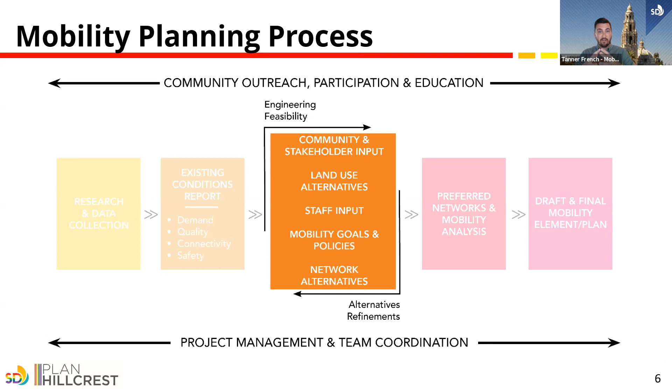So next slide. The longest and most involved is this current middle section that we're in now. As shown, this includes developing concepts and network scenarios, as we discussed in January, and we'll continue that discussion today, obtaining input from the community and various other stakeholders. And in the coming months, this will also include measuring our recommendations with land use scenarios for compatibility and developing plan policies. So next slide, just to kind of remind us of the conversation in January.

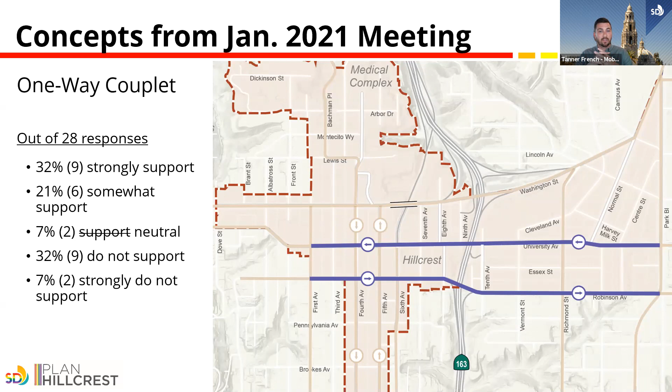The presentation in January centered around 2 main concepts for University Avenue. The first was a couplet concept, where University Avenue would become one-way westbound and Robinson Avenue would become one-way eastbound. As seen on the slide, the concept received a mixed bag of support and non-support. Through discussion and review of the meeting chat, we heard valuable input about some drawbacks of a full couplet concept.

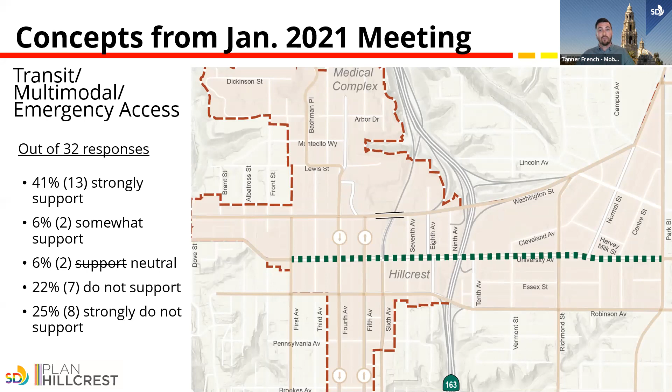The second University Avenue concept was converting the corridor to transit, active transportation, and emergency vehicles only, as depicted on the slide. Again, the concept received a mixed bag of support and non-support. However, through discussion and the chat, there was more dialogue about how to improve the concept and things to consider if it moved forward. So elements of both concepts have been carried forward and modified, while some have been completely eliminated.

I also wanted to quickly discuss other miscellaneous but very important items that we discussed in January. We discussed operational issues like intersection treatments and different types of mid-block crossings. We also heard a lot of feedback about park-once opportunities, as well as mobility hub treatments and alley activation. While we won't necessarily cover these topics again tonight, they are things we'll continue to work on and look to implement in the plan.

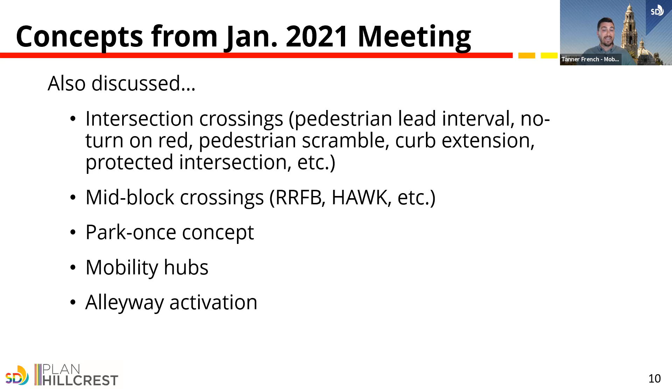Okay, so on to what we're really here to talk about tonight. After receiving input about those higher level concepts we discussed in January, our task has been to develop the full roadway network recommendations. But also stepping back a bit, we wanted to make sure that we're staying connected with the other disciplines and the plan update process as a whole.

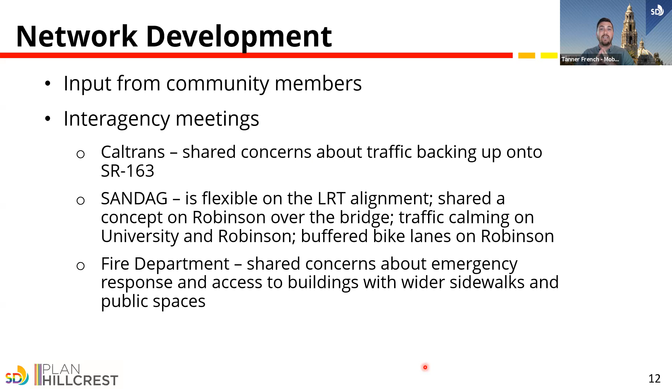Aside from this group's input, we've also solicited input from other stakeholders, including Caltrans, SANDAG, and the city's fire department, to discuss and vet the information. Each of these groups provides unique perspectives, and cumulatively we've used all of the input to develop 3 network scenarios that we'll present tonight.

So when Chen Ryan staff walk through the respective options, they'll start with the central theme of the option, which is University Avenue, but also note key recommendations throughout the community. They'll do this from a perspective of all modes, and show how they're all interacting within that specific scenario. The first scenario carries forward that transit, multimodal, and emergency-only setup for University Avenue, but it introduces changes we've made based on feedback.

The second allocates right-of-way for transit-only lanes, but continues to allow vehicular traffic on University, an option we wanted to look at. And third is a hybrid option that we've developed to try to incorporate some of the benefits of both of the first two options.

Each of these options will provide distinct benefits for certain modes while being unable to do so for other modes, because of competing priorities and constrained rights of way. That's really the point we want to get across tonight, showing those interactions, and that's really what we'd like to get feedback on tonight. As Chen Ryan staff walk through each scenario, they've included an overview of the network from the map perspective, top down, followed by cross-section views of the main roadways so you can get a good sense of what each would look like.

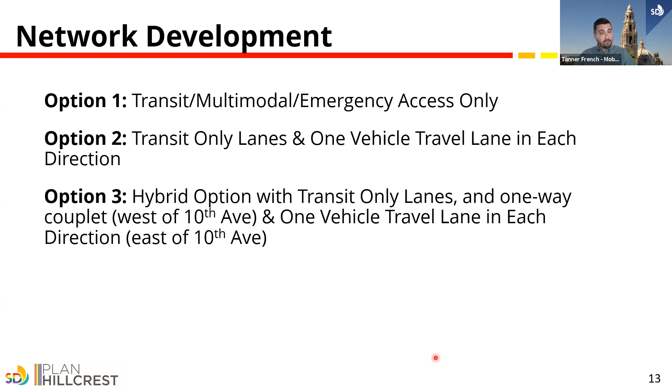What we'd like as the outcome of tonight's meeting is not to fully decide on a network scenario, but rather to provide information on the options and obtain feedback on each of them. Our plan is to tailor the options based on that feedback and include them in the online community engagement tool that Shannon and the rest of the team will be unveiling later in the fall. That will be the mechanism to finally provide a vote on each of the options.

Okay, so with that, I'll pass the presentation over to Monique from Chen Ryan to discuss the pedestrian and transit network quickly, and then jump right into our first network scenario. Take it away, Monique. Thank you so much, Tanner.

Good evening, everyone. As Tanner mentioned, this evening we have a lot of materials, and I want to start talking about the various mobility networks for each travel mode. For pedestrian and transit travel modes, we're only going to have one network to share as there's not going to be a whole lot of variation. So I'm going to start with the pedestrian network here.

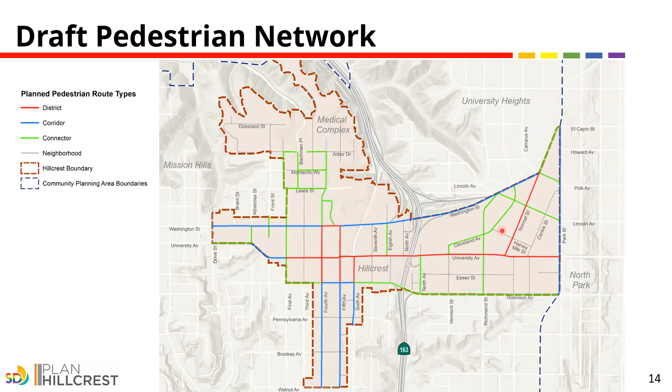Based on our team's review of the light rail alignment earlier, it was showing from 5th Avenue going up onto University, then up onto Park Boulevard. But because we know the cycle tracks are coming on 5th Avenue, and 5th Avenue actually provides some very important direct vehicular access to existing buildings and townhomes, we as a team thought that 6th Avenue is a better alignment for the future light rail.

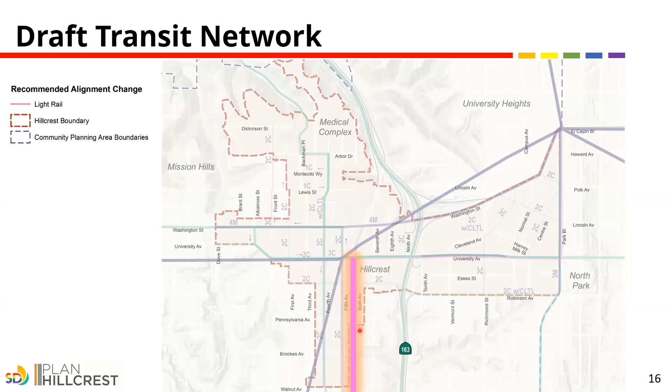Now we're going to option 1 of the vehicular network. This option reflects what Tanner mentioned earlier, the transit multimodal emergency access only option for University Avenue, which we discussed back in January at a pretty high level, and it received about 50% support from participants during that meeting. So we as a team decided to take a closer look at this option. In the next slide, we'll show the roadway changes suggested for the option 1 network.

The red line on this map is the transit, emergency, and multimodal only corridor, spanning from 4th Avenue to Park Boulevard. While this option provides a superior corridor for walking, biking, and transit operations, it does also create some challenges in terms of vehicular circulation that could potentially impact access to local businesses located adjacent to University Avenue.

Tanner mentioned that we've talked to the fire department, so we heard some concerns from our fire department in terms of access and also potential response time for them to get to emergencies if this section is closed to vehicular travel. There's a fire station located on 9th and University.

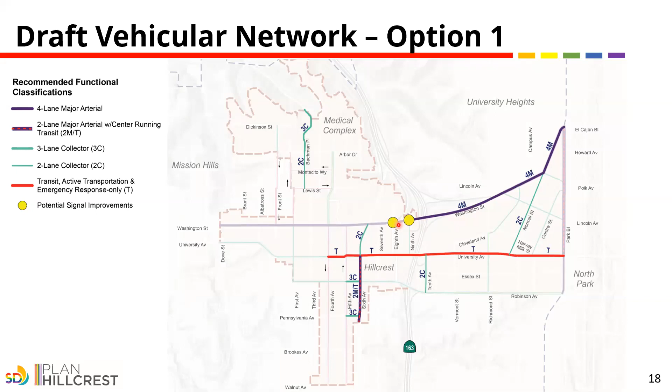Two other things I want to point out here. One is SANDAG is working on, as you all know, the Bachman Place Bikeway project. As part of that project, SANDAG is proposing contraflow bike lanes on 3rd Avenue between Lewis Street and Washington Street, as well as Lewis Street between Bachman and 3rd Avenue. I'll talk a little bit about some of the benefits of this contraflow bike lane.

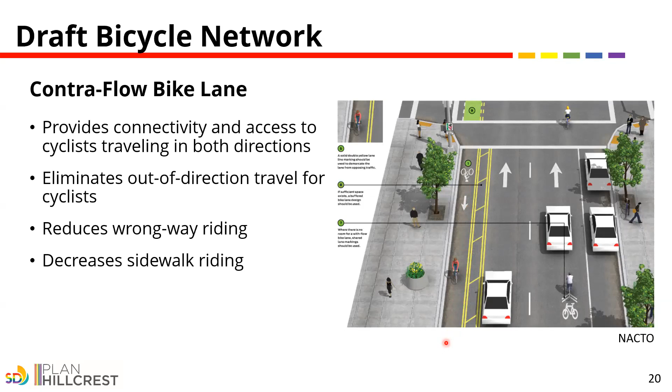So, contraflow bike lane—here's a figure from NACTO, an approved design style. What does it do, and why do people want to provide contraflow bike lanes? It provides connectivity and access to cyclists traveling in both directions on a narrower street, and eliminates out-of-direction travel for cyclists. The more direct the route, the more chances people want to bike. This provides a direct connection so cyclists can stay within the route they planned for. Because you have the bike facility covered on a one-way street, it also reduces wrong-way riding as well as sidewalk riding.

An advisory bike lane is also called an edge lane road. This kind of facility works well in a narrow setting where we have right-of-way or roadway pavement constraints. However, it really works best in low speed, low volume scenarios.

Here are a few pictures we gathered from various cities. Europe uses a lot of these, as well as the Midwest, like Minneapolis on 14th Street, plus the East Coast and Canada. So this kind of application is relatively new.

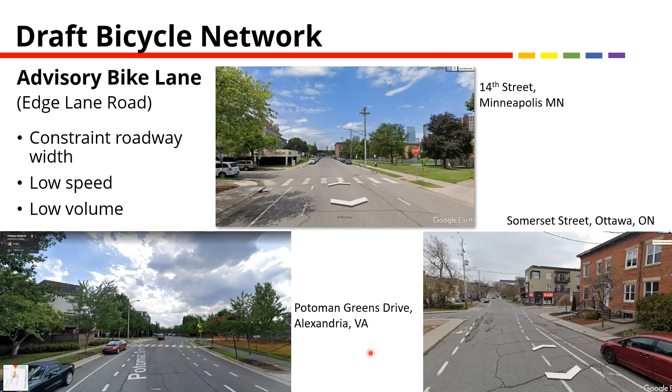However, our city is already starting to look at where else we can implement these kinds of facilities. I know transportation and stormwater are looking at potentially putting an advisory bike lane on Hancock Street, just north of us here.

Now, there's a lot of information. Now we'll dive even deeper and start looking at what some of the roadways could look like with the various street options. So I'm going to focus on option one.

Since University varies in size and cross section as of today, we decided to break this corridor into three sections. The western section focuses between 1st and 6th Avenues, the middle section is between 6th and 9th-10th Avenues, and the eastern section is 10th Avenue going east all the way to Park.

I'm going to present University and Robinson as a pair, so we can see how these two corridors can work together.

First, the western section of University is relatively similar to what it is out there today, with a 30-foot curb to curb. However, what we're proposing is to eliminate on-street parking on one side in lieu of installing class 2 bicycle lanes in both directions.

In the pair south of University, we're looking at Robinson Avenue in the western section, 36 feet curb to curb existing, and we're not making any proposals to change the cross section under option 1.

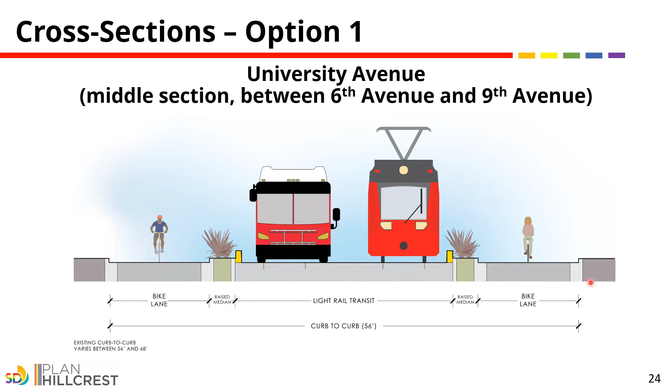Going down from the same section onto Robinson, this is probably one of the most constrained sections on Robinson. This is right on the overpass at 163, only about 26 feet curb to curb, so we're not proposing any changes under this scenario—just one lane per direction with no on-street parking and a class 3 bicycle route.

Going east onto University, we're maintaining the center running transit. Now we're having a little bit bigger buffer because we have more room to play with, and again, the dedicated separated bicycle lanes or cycle tracks.

So what I want to point out is that the existing curb to curb for a large section of the eastern section actually ranges from 103 to 110 feet. There's a lot of room that can be converted into pedestrian realm, wider sidewalk, place-making opportunities, as well as linear parks. Going east between Normal and Park, the road narrows a little bit.

So that facility, the extra wide sidewalk, may have to go away on the eastern side.

South of University Avenue, on the eastern section of Robinson, this is again very similar to what it is out there today. We're not planning or proposing any changes for this section under option 1.

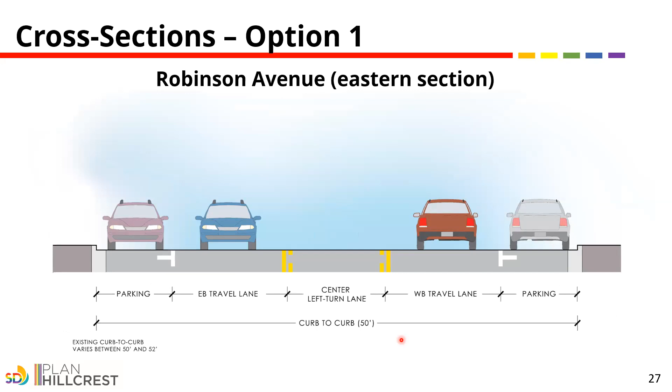So to think back, we didn't propose any changes on Robinson Avenue under option 1. Most of the variations you see—the roadway modifications proposed—are along University Avenue.

Quickly talking about 5th Avenue, you've probably all seen construction happening there to implement the cycle track. This reflects what's going to be out there very soon, and also kind of a mirror image of what 4th Avenue could look like, with the exception that everything's traveling southbound.

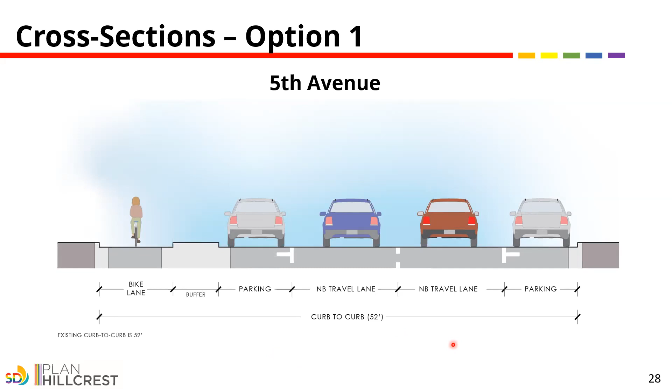We talked about 6th Avenue being one of the potentially better alignments for the light rail. Here is a cross section representing what future 6th Avenue could look like—converting one travel lane from each direction into a light rail guideway, with on-street parking also lost in certain areas.

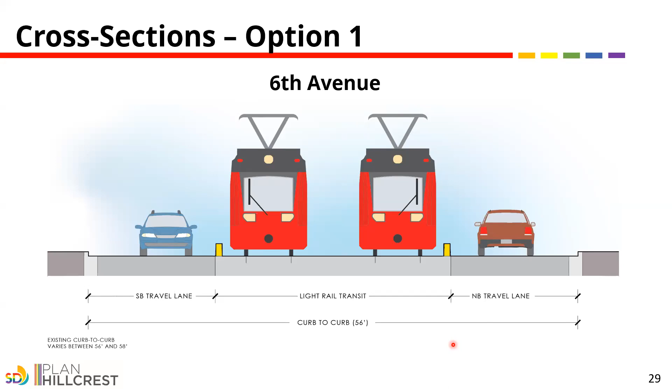Herbert Street reflects the advisory bike lane, 40 feet curb to curb with on-street parking maintained. We go ahead and start designating the bike lane. These are going to be marked and striped on the pavement. But what is different than any other road is that the vehicular travel lane is much narrower than two lanes. It's really just one travel lane.

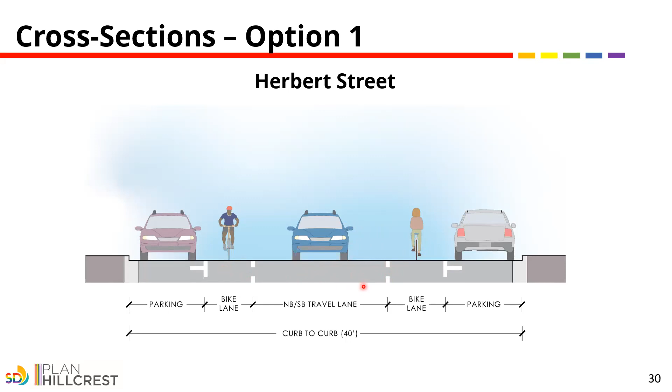So when you see two vehicles coming from both directions, one vehicle would either veer off and get into the bike lane so the other one can pass. As it continues to move, they can merge back into the travel lane. So this really provides a higher quality, more comfortable experience for cyclists with this scenario.

With that, I'm going to pause and ask if there are any clarification questions for option 1. As both Tanner and Shannon mentioned, we're going to have a bigger discussion toward the end as you listen to all of the options. So for this next 5 minutes, if there are any clarification questions for option 1, I'm here to answer.

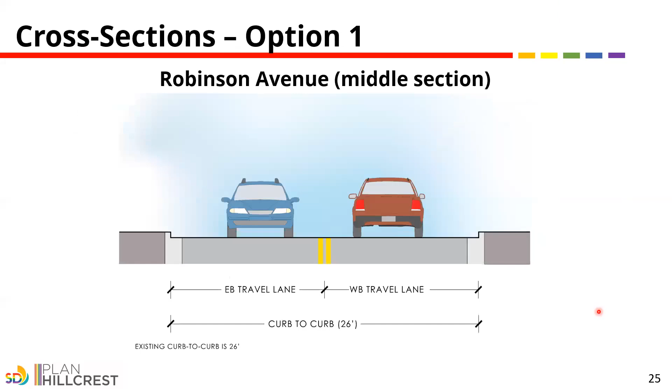That comes around with the 5 big moves. Our region is pushing for this. The University and 5th corridors were added as part of the 2021 RTP. As you can see, there's even commuter rail proposed within University. Dark blue is actually commuter rail, so it's probably coming in the form of grade separated, either elevated or subway style. This is part of the 2021 RTP that's out there for public review. SANDAG is anticipating to adopt this plan later this year in October.

I see. But the 5 big moves overall has like a $177 billion price tag. So is there any schedule assigned to this portion of the plan?

That's a great question. Tanner, sounds like you want to say something. I would just say that they have reasonably expected and revenue constrained options. I don't think we're necessarily here to talk about SANDAG's process, but what we work with them as our long range transit planners, and what they're showing in their plans, we will do the best that we can to accommodate.

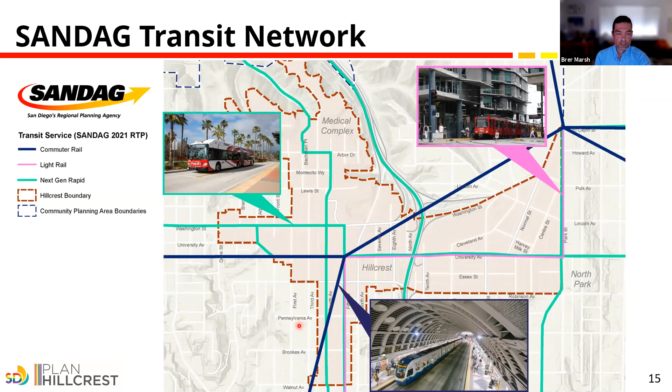I just have one additional comment, and that is I noticed there was a diagram of Robinson. It seems that it's going to remain car only because of its width. I'd just like to point out that it is used by cyclists and pedestrians as a connection down the hill to Little Italy, so please keep that in mind, because it is one of the shortcuts to get from downtown Hillcrest to Little Italy on a bicycle quite quickly.

That's why you've got to listen to the next few options. Yeah, there's some more exciting stuff coming. I appreciate it, thank you.

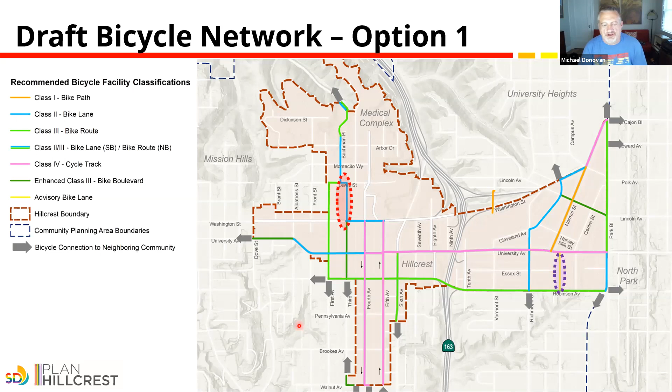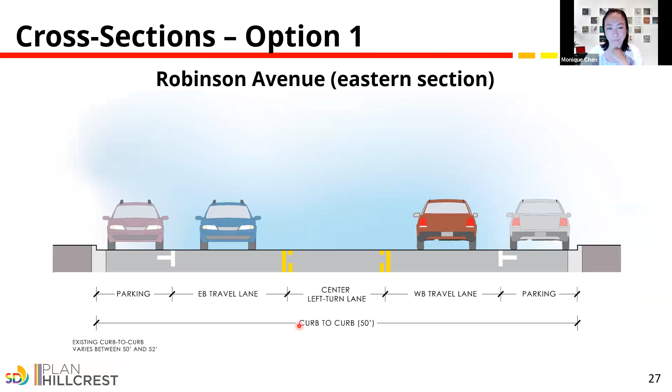Okay, I was just concerned. I've seen cities put in light rail that only goes one direction, and it tends to be fairly restrictive, particularly when there's an outage in the road or construction. Agree, 100% agree. All right, thank you.

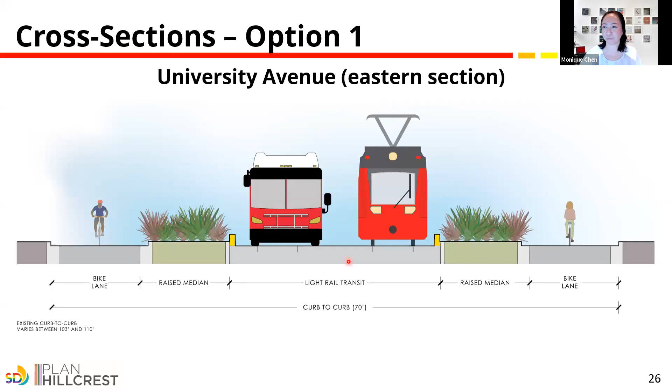Good evening, everyone. So I will be discussing option 2, which facilitates vehicular access throughout University Avenue in the interest of serving the businesses that are based there. This option is very similar to option 1, so I will focus on the changes that occur instead of the whole network discussion, also in the interest of time.

Under this option, University Avenue between 6th and Park will be one lane for vehicular traffic in each direction. It will have transit running down the center of University Avenue, as well as we are proposing a change along Robinson Avenue between 10th and Park, which I will cover in the next slide.

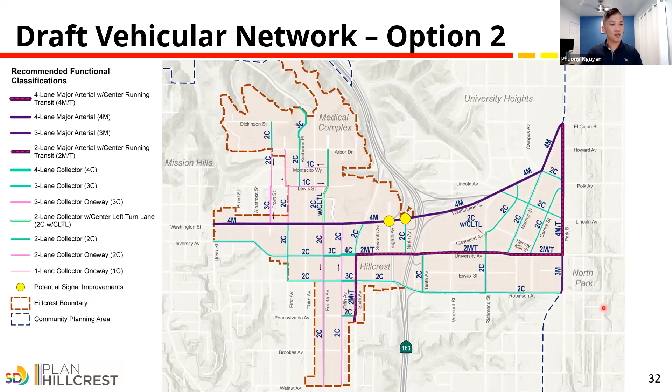As shown on your screen, most of the options are very similar to option 1, with the exception of University Avenue, which will be one lane in each direction for vehicles, and we will discuss that when we go through the cross sections. Robinson Avenue will be converted from a two-lane road with a two-way left-turn lane to just a two-lane roadway, repurposing the existing two-way left-turn lane for class 2 bike lanes.

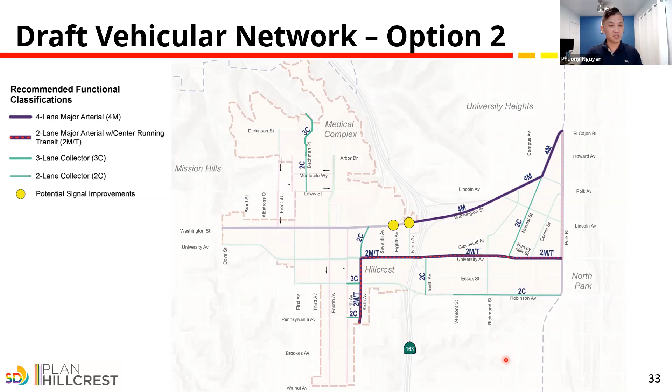So as I mentioned, under this option there are some challenges regarding University Avenue. One issue is that there is a lack of a full premium bicycle facility along University Avenue, specifically between 6th and 10th, where there are constraints due to right-of-way and existing buildings that are relatively new, especially over the bridge. Thus, in order to offset this effect, we propose to also include a class 4 facility along Washington. We understand that Washington does cross through quite a few freeway entrances and exits, creating very unsafe conditions there, so additional engineering treatment would be needed along that corridor.

Additionally, Robinson Avenue will be a class 2 between Vermont and Park, and University between 10th and Park will remain as a class 4 cycle track.

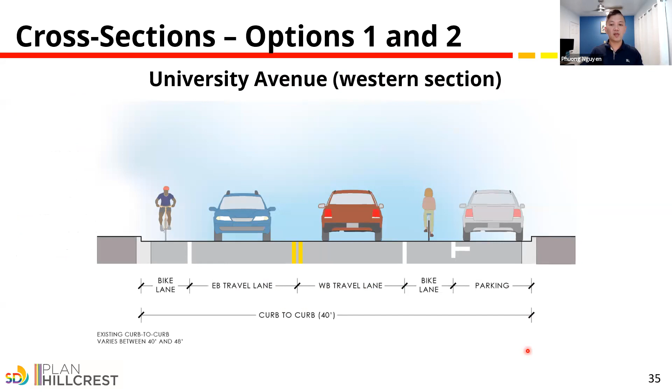So just to paint a better picture, we'll be discussing the cross section similar to option 1. University Avenue in the western section remains the same as what Monique presented for option 1: a two-lane roadway with bike lanes on both sides and parking on one side. Robinson Avenue is similarly the same as option 1, still with full vehicular access and parking on both sides.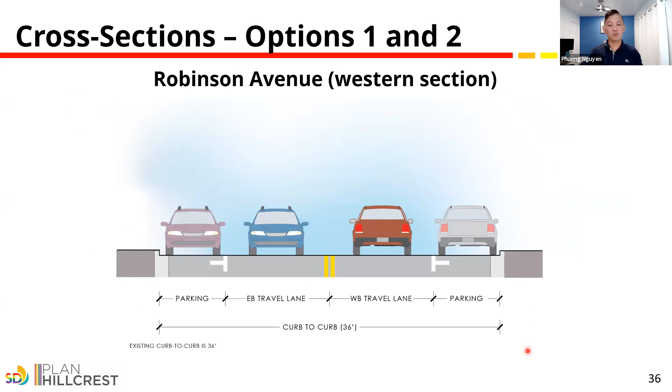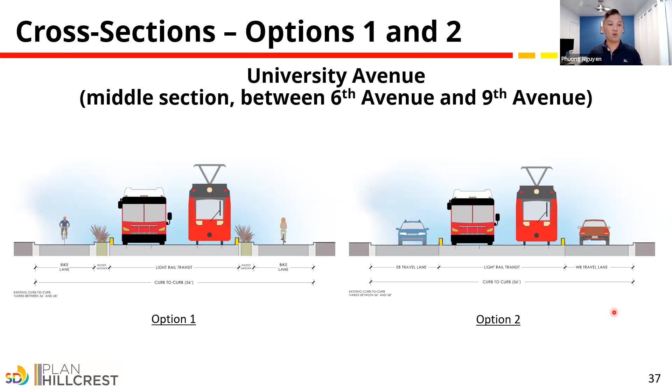There's a difference between option 1 and option 2 for the middle segment due to the constraint along this section, especially the bridge, and the right-of-way in front of Whole Foods. The bicycle will have to share the facility with vehicular traffic for the eastbound and westbound travel lanes, whereas light rail transit takes up the center of the road, compared to option 1 where those are replaced with a class 4 cycle track.

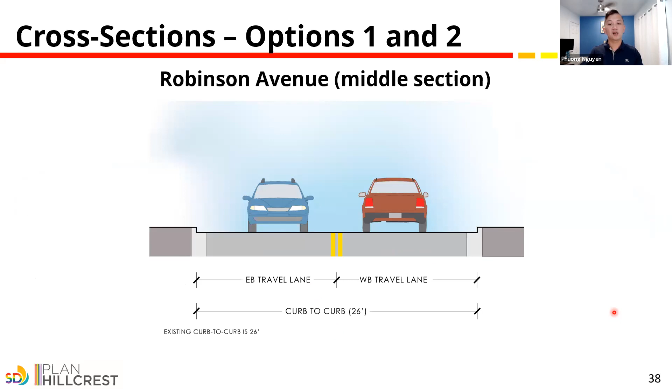Robinson Avenue for the middle sections will be the same, remaining the same as option 1, just 2 lanes, 1 lane in each direction, especially over the bridge.

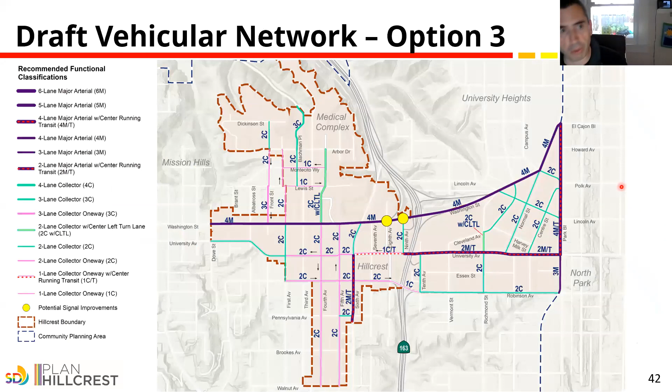Thank you. Are we ready to move on? Sasha, let's move on. Does my audio work, can you guys hear me? Oh yeah, we can hear you now. Good, I think whichever device I started with stopped working and I switched over.

So this is option 3. This option was developed to blend the benefits of options 1 and 2, providing a separated east-west bicycle facility through Hillcrest along University Avenue, while also accommodating the SANDAG planned transit right-of-way and maintaining vehicular access. The option 3 network accomplishes this by converting University Avenue and Robinson Avenue to a one-way couplet in Western Hillcrest. In the next slide, we'll show what changes to the roadways are suggested as part of this option.

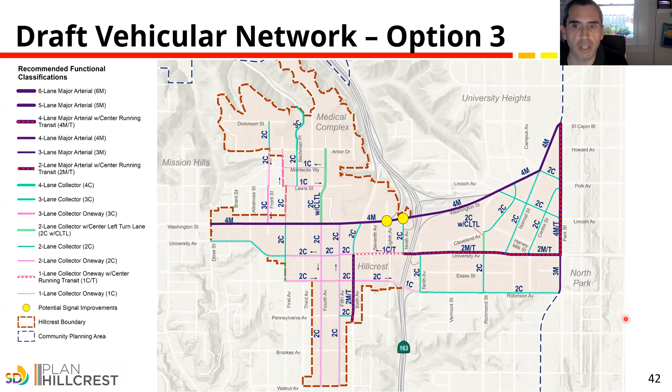In this option, University Avenue is westbound between 1st Avenue and 9th Avenue. The fire station on 9th and University thereby maintains access to University Avenue in both directions. The Robinson one-way portion is eastbound between 1st and 10th, enabling motorists in Western Hillcrest to still access 163 in both directions along Robinson, southbound at 8th and then northbound via 10th.

The one-way couplet enables the most constrained segment of University in Western Hillcrest, between 6th and 9th, where the curb width is 56 feet, to go to one travel lane, creating the space needed to continue the bicycle facility and the transit right-of-way. That'll be shown in the cross sections later on.

This network also features some of the same changes that were recommended in the first 2 options, such as what is recommended for Washington and Eastern Hillcrest, the Bachman classification, as well as Normal and 6th. All of those are the same in each of the 3 options you've seen.

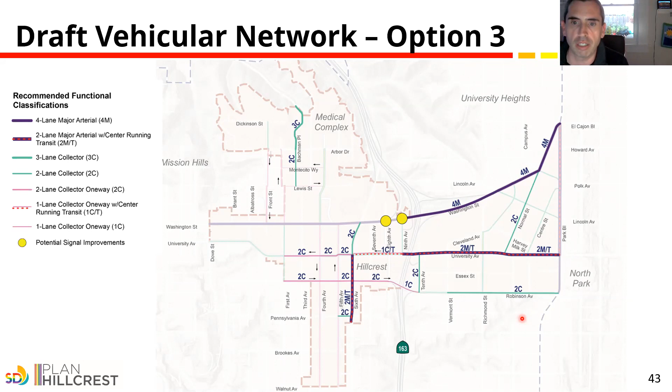An added benefit of this option, in addition to being able to complete the cycle track through most of Hillcrest, is that this can also enable continuous bike lanes on Robinson Avenue as well. The most constrained part of Robinson is the bridge over 163. Bringing that section down to one lane creates the space available for bike lanes over the bridge using the counterflow style bikeway design. The upcoming cross-section slides will show how the one-way roads and the bicycle facilities interface in this option, allowing for two-way bicycle travel.

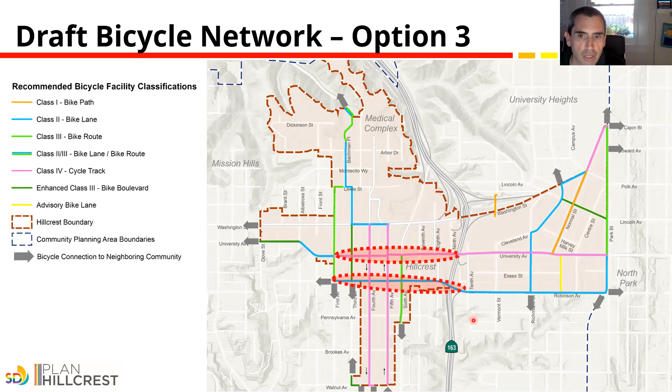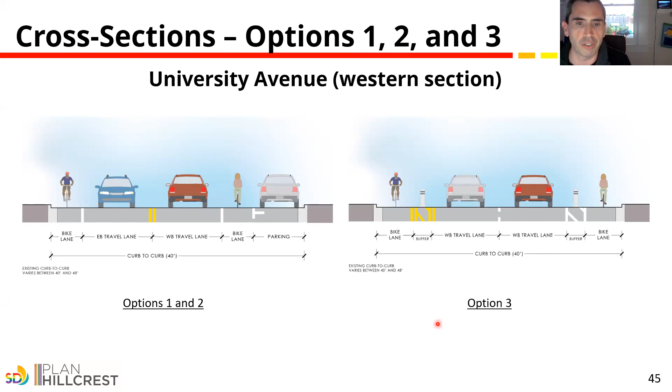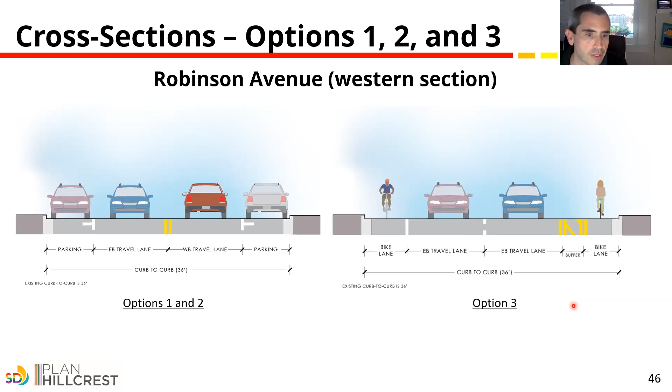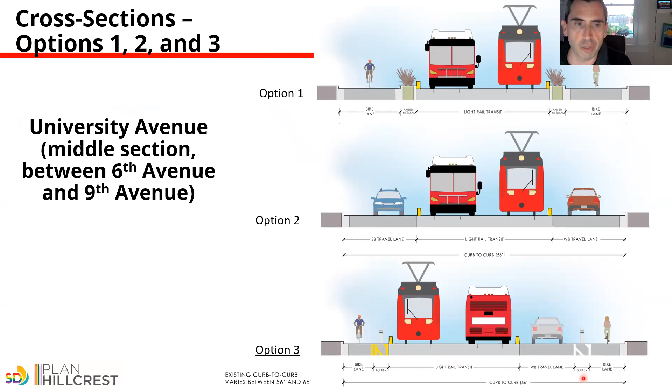In this option, University Avenue between 6th and 9th has one travel lane going westbound. This is where University would have to drop down to one lane in order to fit all of the different modes being accommodated - the one westbound travel lane, the transit right of way, and the cycle track going through this constrained part of University in Western Hillcrest.

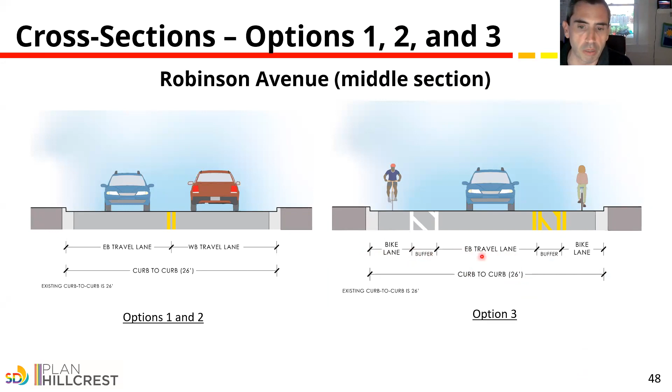This is Robinson Avenue over 163. This is a very narrow bridge, as many of you know, and by eliminating one travel lane, allowing the one-way couplet to go down to one travel lane instead of two, provides the space needed to have bike lanes going in both directions.

In option 3, University from about 10th to Normal is the same as what Fong presented in option 2. It's a 2-lane with two travel lanes, one in each direction, with the transit and the cycle track and parking, and quite a bit of leftover space from the current curb to curb width in that area, which is about 103 to 110 feet of width. That extra space we envision could go towards pedestrian amenities or perhaps this need for park space, linear parks, or other urban design type elements.

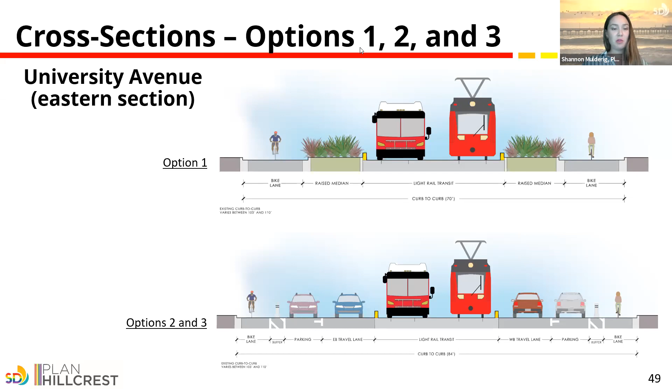Is there any other subcommittee member who wants to make a comment? If not, Monique, if you could pull up the last slide. I just want to talk before the meeting ends about our next steps.